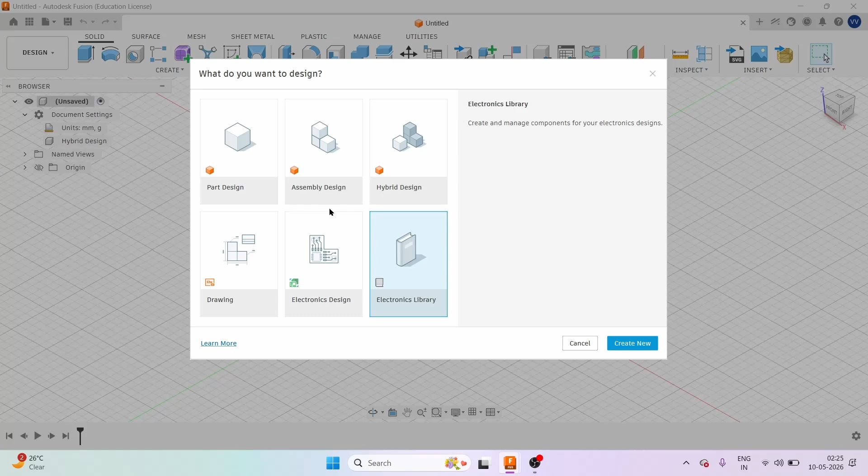In this lesson, we're going to design a two Spur Gear system. To start, we'll set the type of design, and as usual, we'll select hybrid design and create new.

Now we are in the solid workspace, so we can change to utilities by selecting utilities, then go to scripts and add in, and select it. Now we just scroll down until we find Spur Gear, click it.

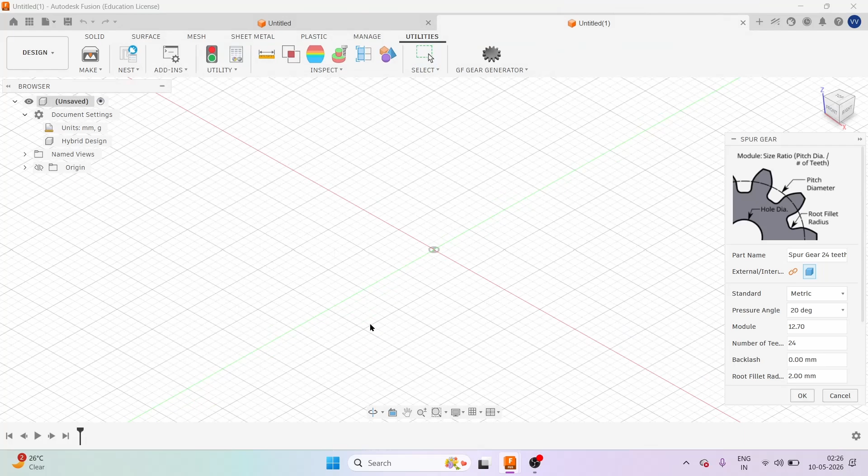We'll see that we have to generate a gear in this case. To start, we can keep the pressure angle as 20, and if yours is not 20, you can change it here to 20, and make sure that standard is set to metric, not English but metric.

The module, we want to set it as 2, and the number of teeth for the first one we want 18, and the gear thickness we want it to be 3, and the hole diameter we also want as 3.

We'll see that we are unable to generate our gear until now. That's due to the root fillet, which has to be less than 1.2.

So now we can change this, the root fillet, to 1, and then keep this as 18 for the number of teeth of the first gear, and then we can click OK.

Now we can go again to scripts and add in, click it, and then scroll down again until we find Spur Gear again, and click it once.

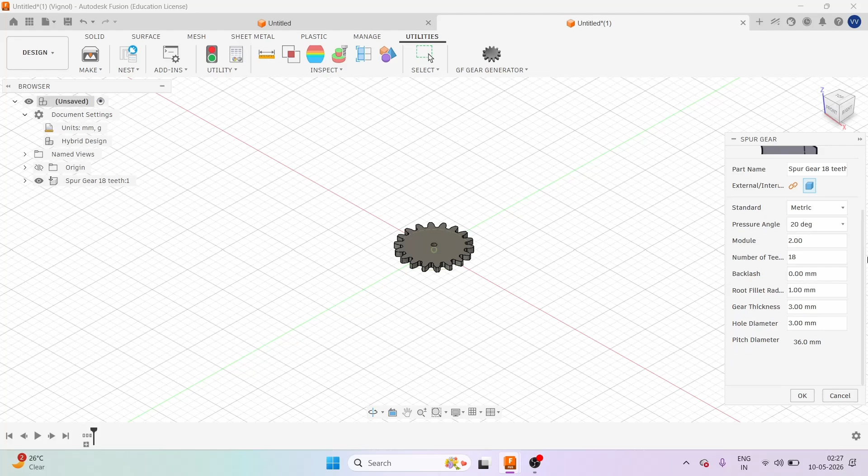Now everything is already set. Make sure that the pressure angle is the same for both of them, and also the module, that's what will allow us to make the motion that we want for this lesson. So the module has to be the same, the pressure angle as well. These two are the most important in this case.

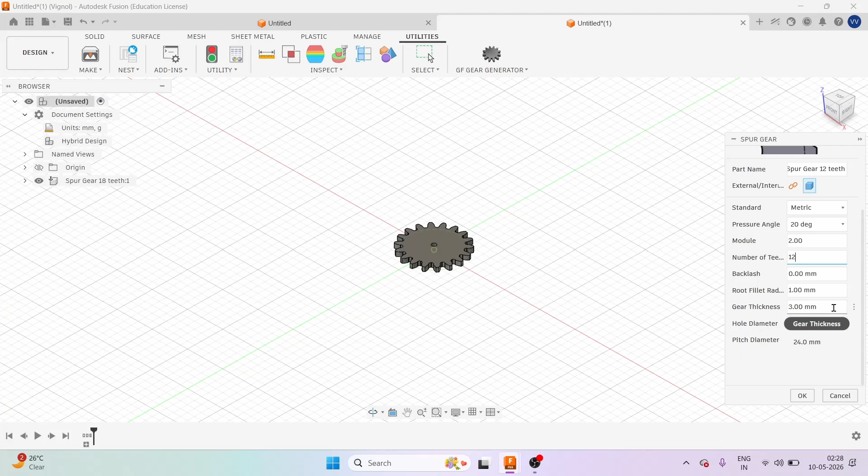Now we just want to change the number of teeth to 12, and you'll see that other things are also the same, like the hole diameter is also 3, the gear thickness is also 3, and the root fillet is also 1. Now we can click OK, and now the gear is already generated.

There are 2 gears actually. So now we can go back to the solid workspace, and now we want to take this gear out of the bigger one. So we can use move or copy, click it, and then select the gear that is in the inner part.

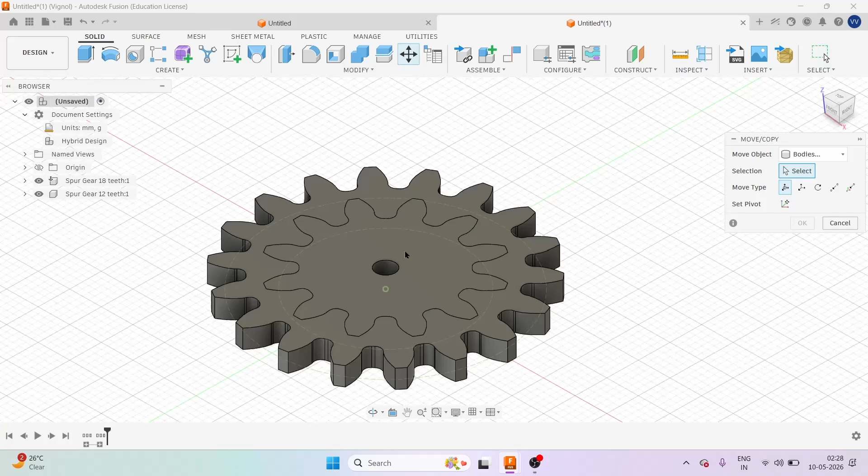In this case, this one, we want to select it, and we want to move it to the right. To have this distance between these 2 gears, we have to first divide the pitch diameter of the first one by 2, and also for the second one in this case.

By dividing and then summing them, we can have the distance between these 2 centers, which is in this case 30. I'll give the calculations in the video description, and you can see and go through it. So it has to be 30 in this case.

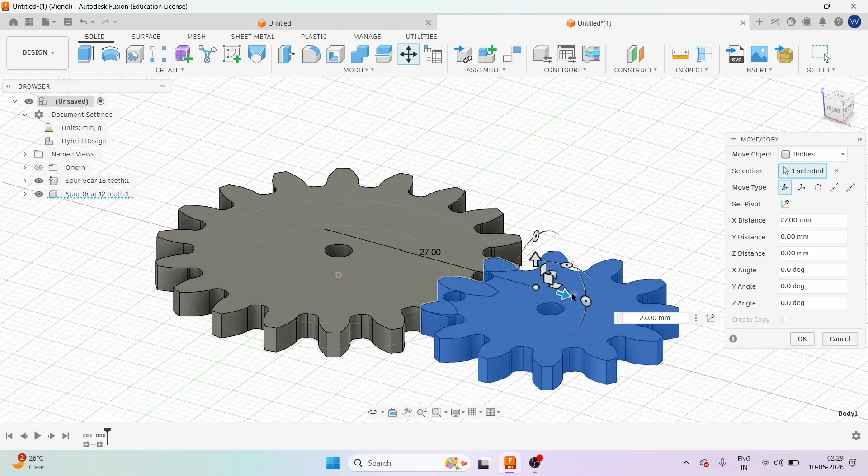Now we want to align it a little bit, these teeth in this case, I want to align it just a little bit. Okay, and don't forget to make sure that the distance between these 2 is set to 30 in this case.

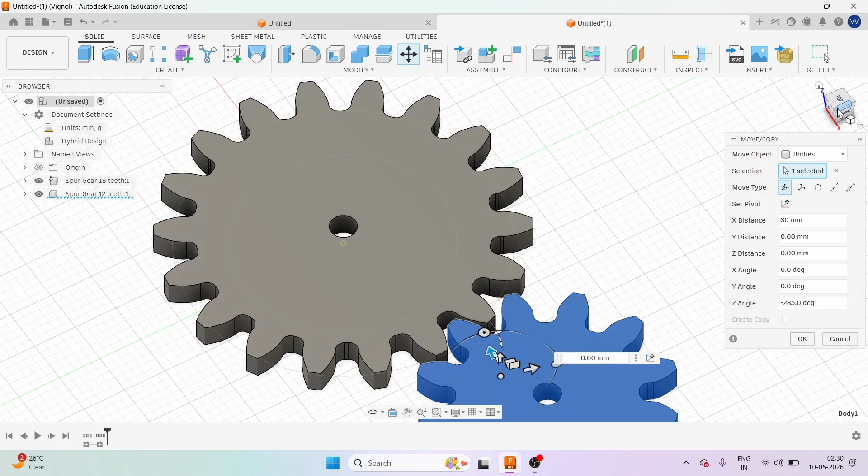Then we can click OK. So that's it for the 2 gears in this case.

Now we can go to the toolbar and select create a sketch, and then we just need to select this part to create a sketch there. That's just the house of our gears in this case.

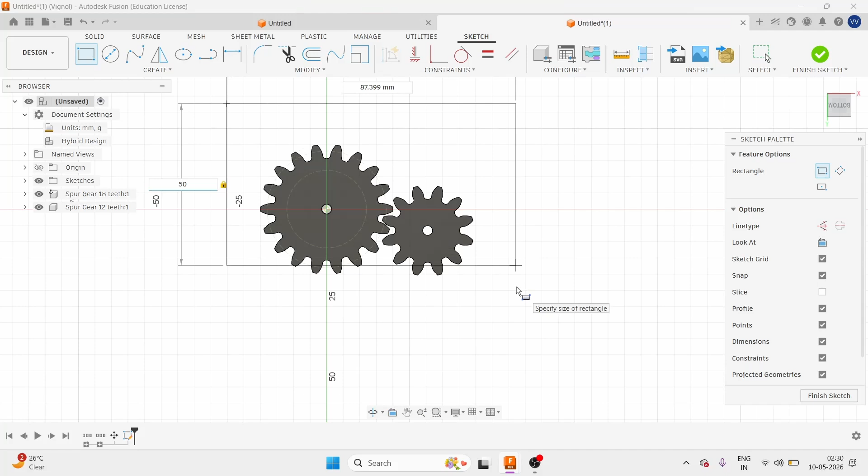Now we can go to the toolbar and select 2-point rectangle, and then we just need to set a random point, let's say in this point, and set the height as 50, click in our keyboard and tab to also set the width as 75, and then we can click OK.

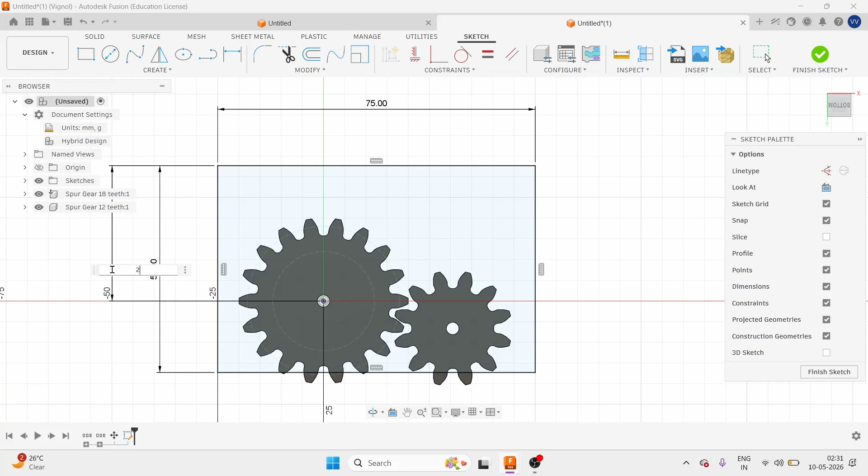Now we can use the sketch dimension tool and select this corner, and now in the center of this Spur Gear, the big one in this case, click to set the dimension to 25, and click OK. We also want to do the same starting with this line and also the center, setting it to 25 as well, then click OK. Now that's how they are in this case.

So now we want to use the center diameter circle to create two circles in this case. You can come here first and set a circle of 2.8, then click OK.

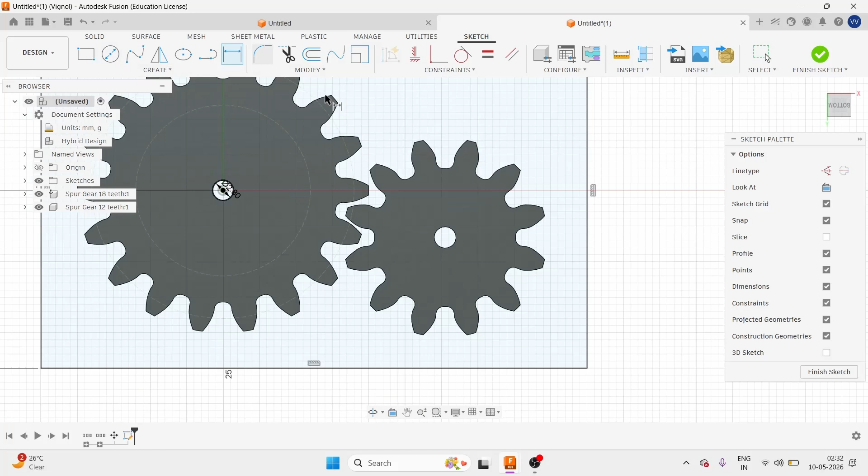Again use the center diameter circle in the center of this one, but as this one is not in the center like the other, we can first project it or use the sketch dimension tool to get its center point, then select and create. Now you can use center diameter again, start in the middle point and set it as 3, then click OK.

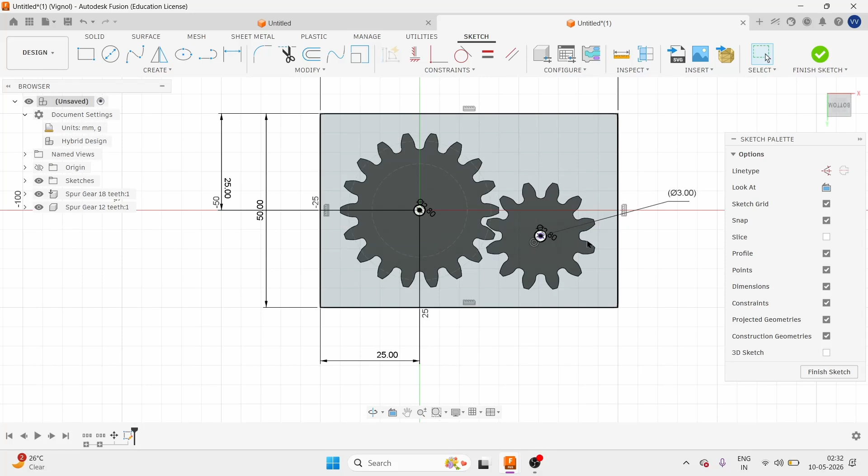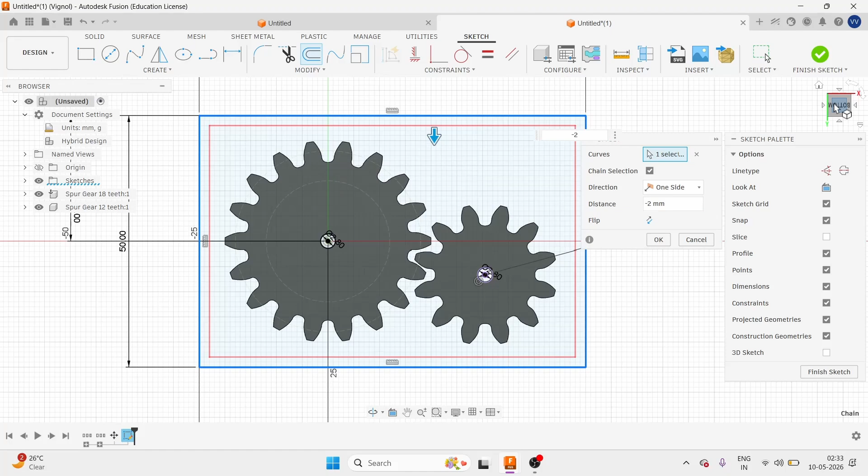Now I want to use offset, so we select offset. We just need to select this rectangle that we've created, and add an offset of -2. In this case it has to go in the inner direction. Now we can click OK, and finish the sketch.

So now we want to extrude it. First let's hide our gears a little bit, both of them in this case.

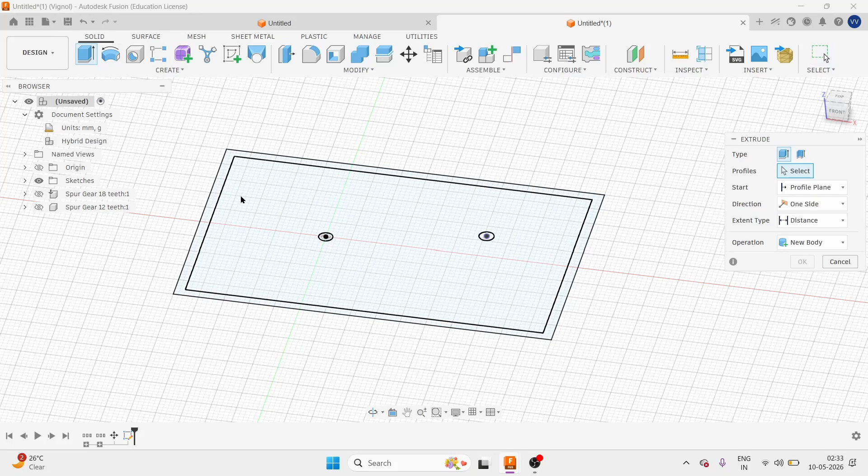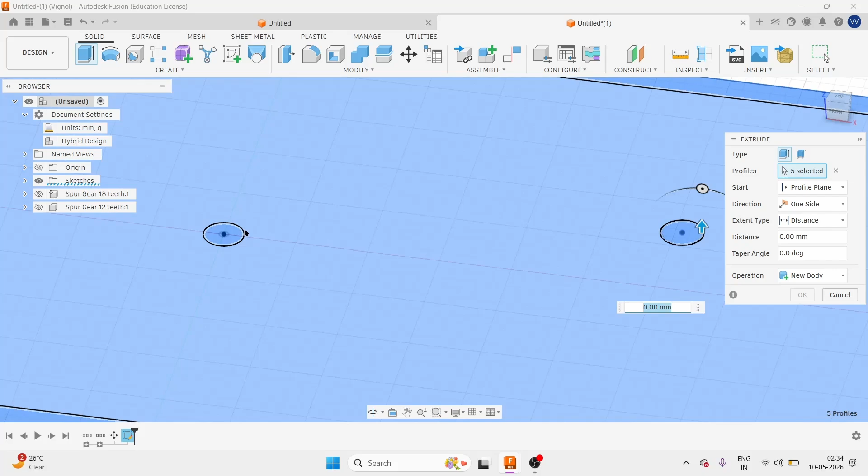Now we want to select extrude, then select this part and also this part, and also these two circles that we've created, both of them, because we've got two in this case, the outer one and the inner one. Make sure you select both, then extrude going in the downward direction, -1 in this case, then click OK.

Now our sketch has vanished. It's just hidden, so we can go to our browser, expand it and unhide it.

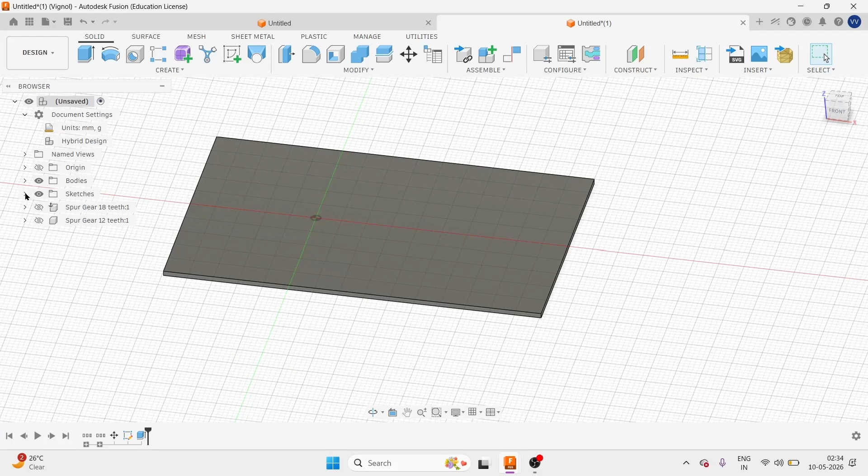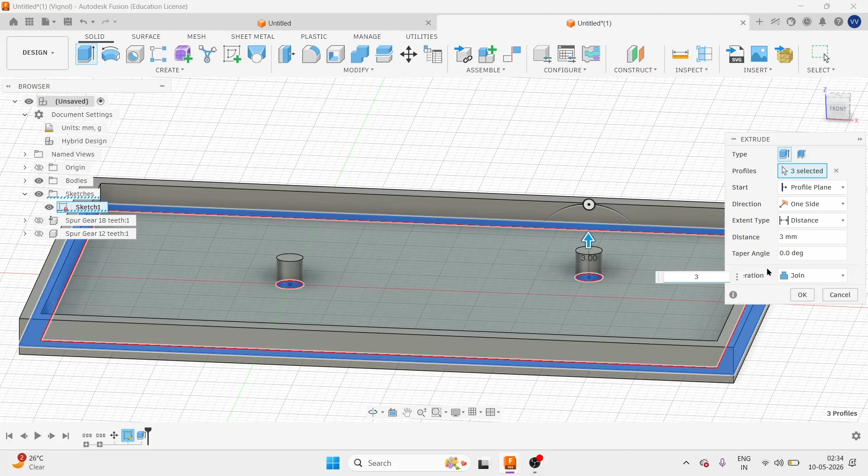So now we just need to select this part and extrude, also selecting the two circles we've created, this one and this one as well. We want to extrude it to 3, so we can move it upwards until it gets to 3, or set it manually as 3, then make sure the operation is set to join, and click OK. Now we can hide our sketch.

So now we can unhide also the two gears that we've created. So those are them in this case.

So now we can convert this body to a component, because that's how we do it when we want to start applying joints. We can right-click with our mouse and select create components from bodies. So that's already converted to a component in this case.

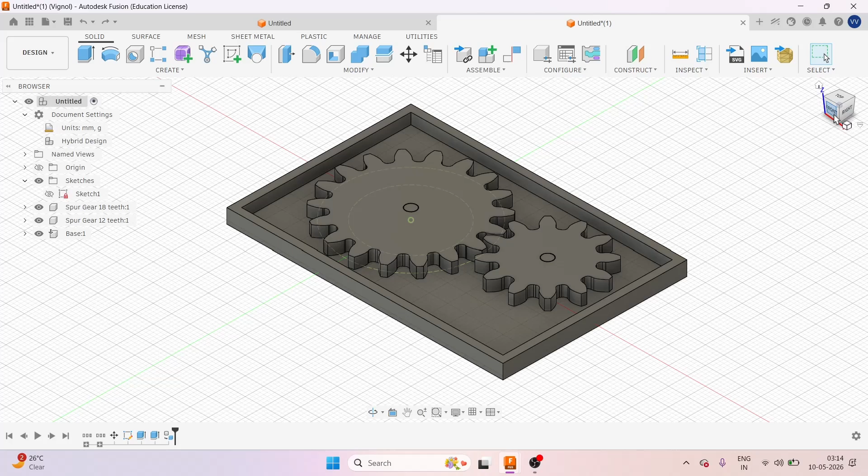So now we can click it 3 times to change the name to base, because that's our base, just to organize in this case, then click OK. So that's our base, already converted to a component. That's all set for this lesson.

In our next lesson, we'll be assigning the joints in this case. I hope you stay tuned so you don't miss the next lesson, because you'll see how the gears will behave and their mechanism.